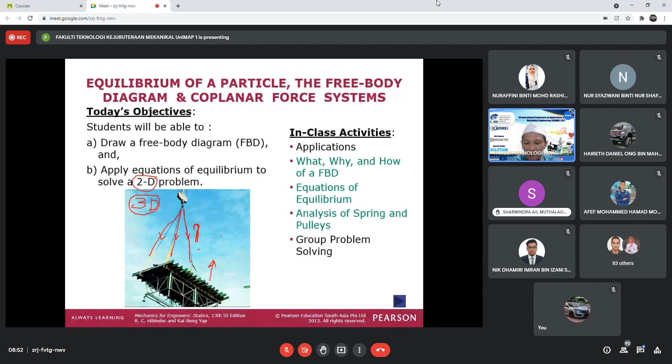So you need to determine what suitable cable to use to lift this object, for example, what size this cable should be, so this cable can withstand the force, boleh bertahan, can carry the weight of the object you want to lift or move. Okay, right. So here you can see this application.

So the crane is lifting a load. For example, we call the load W. W is weight, so the symbol is W. And then to decide if the strap holding the load to the crane hook will fail. So what I see here, they have a strap, like this, like a ring. So they have a cable here, and this is another cable.

Okay. So if we draw the free body diagram, we show it like this. This strap, we assume as a particle. So this force, this other cable, this is cable number 2, this is cable number 3. So we assume F1, F2, F3, and for example F4. So from here, you need to know the force in each cable. You need to know the force in the strap, force here, for example.

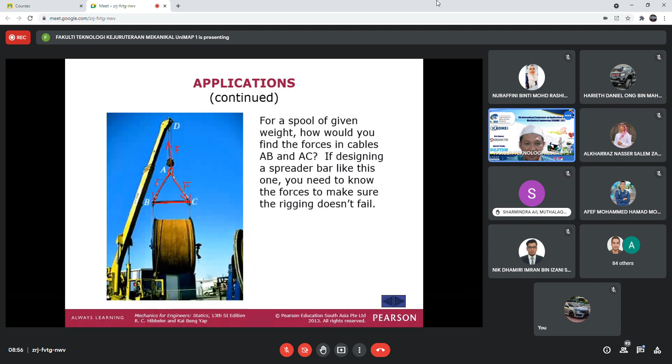Okay, this is the free body diagram. This one we call the free body diagram. In Malay we call it badan jasad bebas. Free body diagram, badan jasad bebas.

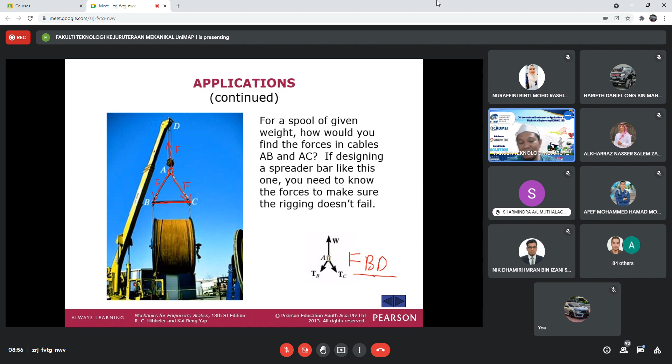Another one. Same procedure, same problem in statics. You need to determine how much force is in this cable.

Okay, alright. How to solve now? The question to you, how to solve now? Okay, for example, this one.

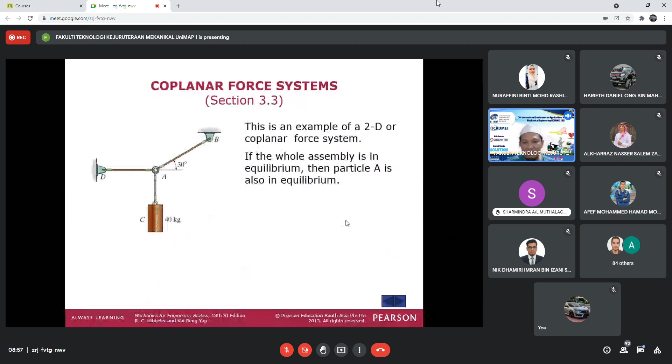For example, in this 2D or coplanar system, if the whole assembly is in equilibrium, then the particle A, this ring, we assume is also in equilibrium. To determine the tension, a symbol T for tension, or force, in the cable for a given weight of cylinder. So they're giving you the weight.

You need to learn how to draw a free body diagram, FBD, and apply the equation of equilibrium, EOE. Free body diagram, FBD. So these two learning knowledge, you need to know: how to draw a free body diagram, and how to use the equation of equilibrium.

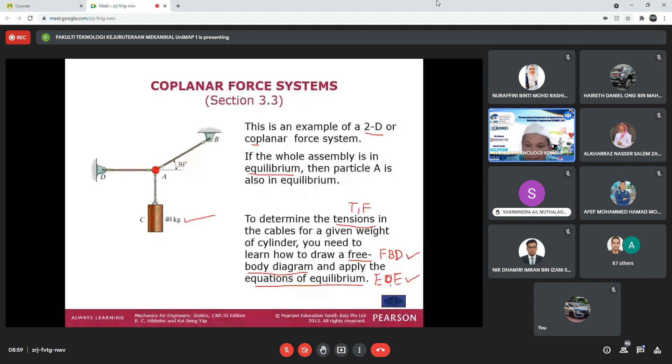From that, what is the equation of equilibrium? Apakah persamaan keseimbangan? And then second is how to use it. Bagaimana nak guna equation ni? Penting ni. So first, you need to know how to draw a free body diagram.

Free body diagram. Second, what is equation of equilibrium? Equation of equilibrium. Third, how to use. Okay, how to use, very important, how to use. This three knowledge, okay, you must know.

You must know this. This knowledge you will study in chapter 3, chapter 5, chapter 6, chapter 7. Four chapters, you will use the same formula in chapter 3, chapter 5, chapter 6, chapter 7. Chapter 5 is equilibrium of a rigid body. Chapter 6, structure. Chapter 7 is friction. You will use these three knowledge.

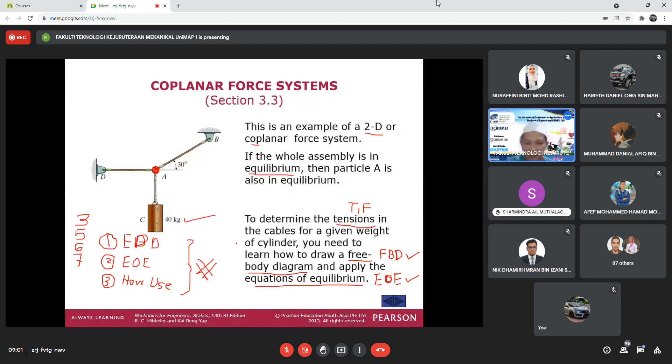Okay, alright. So we continue. We continue. Okay, now, okay, alright.

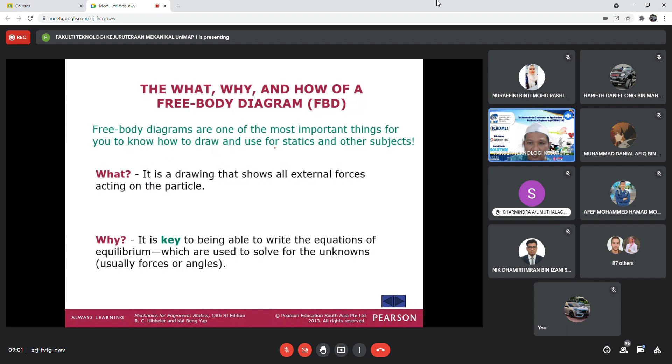The what, why, and how of a free body diagram. Free body diagrams are one of the most important things for you to know how to draw and use for static and other subjects. Other subject that means static. Now you study static. Other subject is dynamic, which is next semester, dynamic next semester in solid mechanics.

External force acting on the particle. For example, you have a particle, so same as what we study just now. You have a particle, so you have cable F1. Maybe you have F2. This one is axis X, this one is axis Y. So they have an angle here, and F2, maybe here they have another force F3, for example. So axis here, angle here. This is external force acting on the particle.

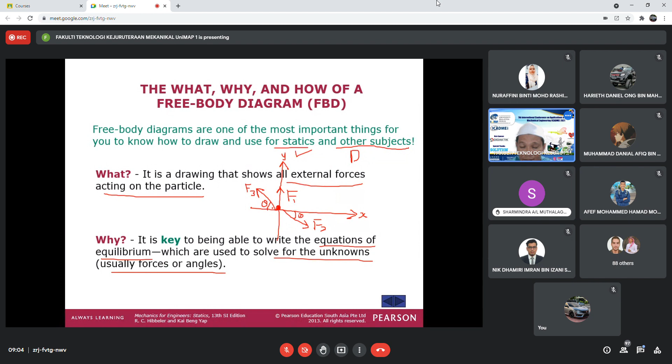Some students solve the problem but don't draw a free body diagram. They calculate and get the answer, and the answer is correct, so I give marks for only maybe half, not full mark. Maybe the full mark is 10 marks. If you calculate and get the correct answer but no free body diagram, you get maybe 7, maybe 5 only. If you draw the free body diagram, show the equation, and calculate to get the answer, you get full marks. Okay, this is a problem.

Some students ask, why you need to draw free body diagram? Actually, very important. It will be useful when you are an engineer. For example, as an engineer, you need to design a lift for a building maybe 10 levels. So as an engineer, you need to design the lift. How much is the speed of the lift? What motor size do you need to use? How much cable size do you need to use? So you design, you design.

You must draw the free body diagram first. You sketch, you draw the free body diagram. You sketch the lift, and from the sketch you write down the forces acting at the design: lift, cable, motor, everything. From that you can calculate how much the size of the cable, how much speed you need to use for the lift. So this is very important, free body diagram.

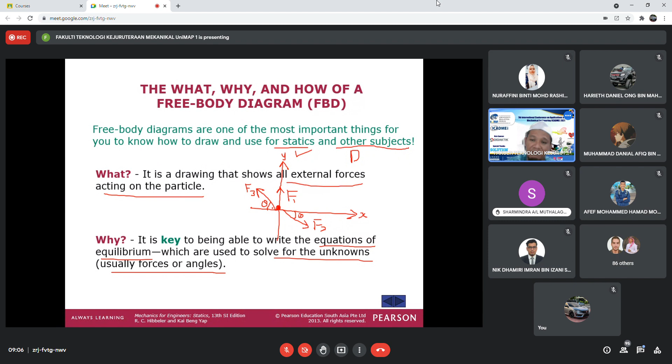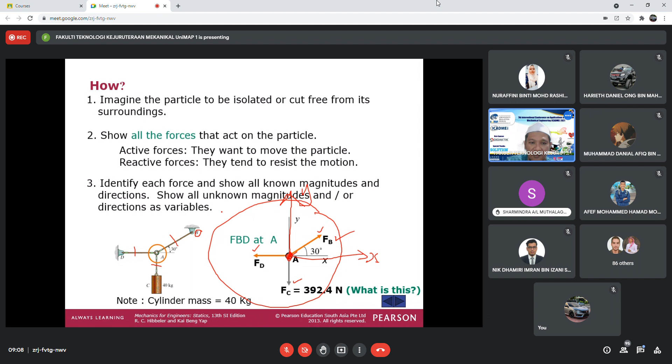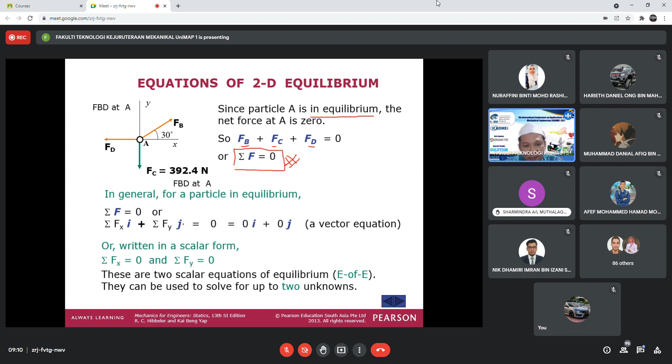You can write, for axis X written in scalar form: Fx equal to 0, Fy equal to 0. From this, summation F equal to 0, so actually they have summation Fx equal to 0, Fy equal to 0. This we call the equation of equilibrium, easy to remember. This is for 2D only.

If you study 3D, summation you have another equation: summation Fz equal to 0. So you study this equation, summation F equal to 0. What is the theory from that?

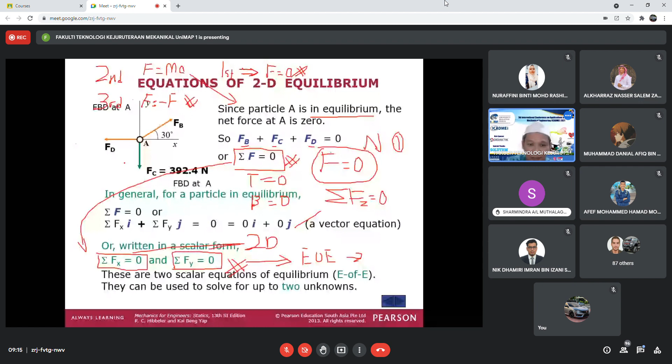Okay, so now you have no question. Using the equation of equilibrium, you can determine summation F for the arrow. So you assume this way is positive, this way is positive, so equal to 0. This is equation number 1, this one is equation number 2.

So from these equations, by mathematical solving, you can determine: FB equal to, you get the answer. FD equal to, you get the answer. If you get the answer as positive, this way is positive. For FD, you get the answer positive. You get the answer from here, then I'll show you. So you get the answer FB and FD from two equations by mathematical solving.

This one is important, using it correctly.

Alright, so until here, any question? Ada soalan?

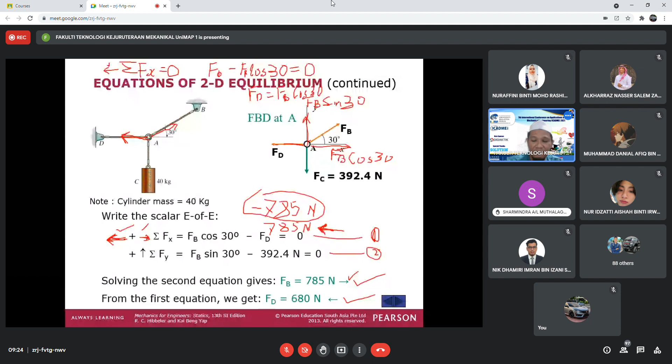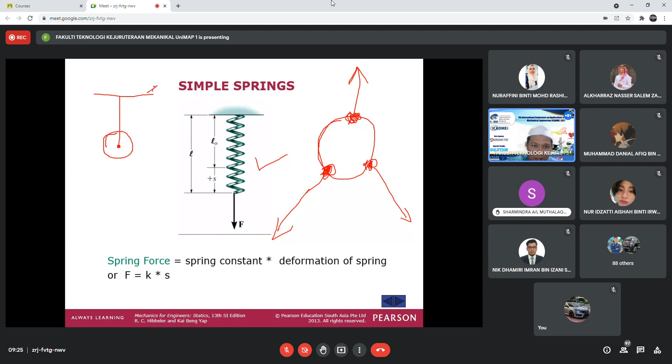Okay, pulley. You know pulley? Takal. In Malay we call... Yes, takal. Kan. Okay, pulley. This one pulley. So they have cable here. So mesh here, mesh.

So another force, another force lah. Force here, force A. For example, FA. So okay. So what you can see from here, this spring, this one spring lah. This spring, this is ring. Okay, ring. Ring. This one is pulley. Okay, pulley. P-U-L-L-E-Y. Pulley ya, pulley.

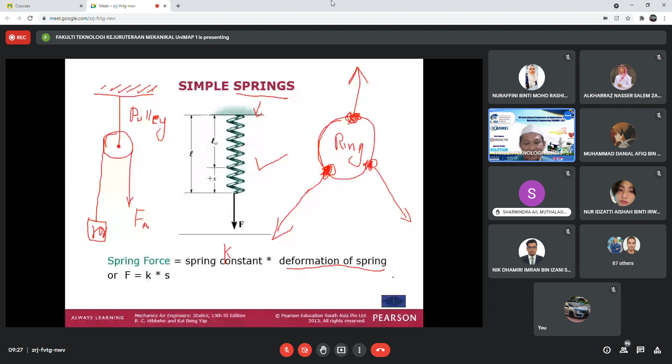So okay, for spring, okay, spring force constant, spring constant, it means K, okay. Deformation of spring, S, S is deformation of spring. When you give the force, you pull, so they have extend. So from LO, we have force. There is no force. When you give in the force, so they increase, they increase length. So L minus LO equal to S. This S is deformation, pemanjangan lah. Displacement. In Malay we call pemanjangan. Pemanjangan. So F equal to KS. This another formula.

Okay. K is the spring constant. We call it the coefficient of spring. In Malay we call it pemalar spring. So different springs have different K. Different K means they have different S. If K is high, S is small. If K is small, S is highest.

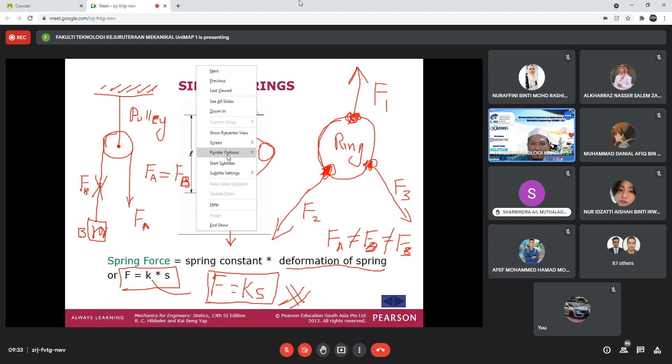So any question? Any question? "No, doctor." Okay, so we proceed.

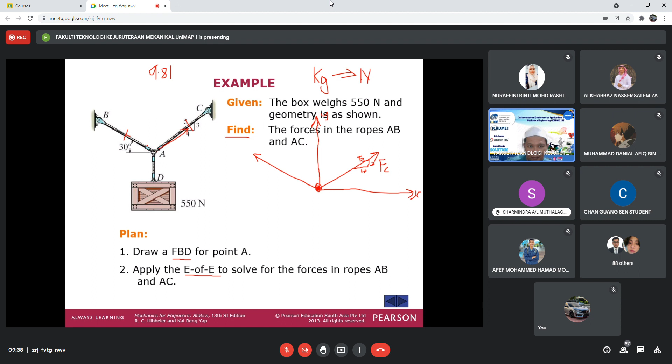I cut here. Okay. So this one is angle. Given to you, angle 30 degrees. So F what? FB, can you put the name? Maybe you need to put FAB. Okay, no problem. You just put F2. Okay, no problem. A1, F1. Okay, but you understand. You understand this. For me, I put FB.

B, and then weight. So the weight is 550 Newton. So you draw free body diagram.

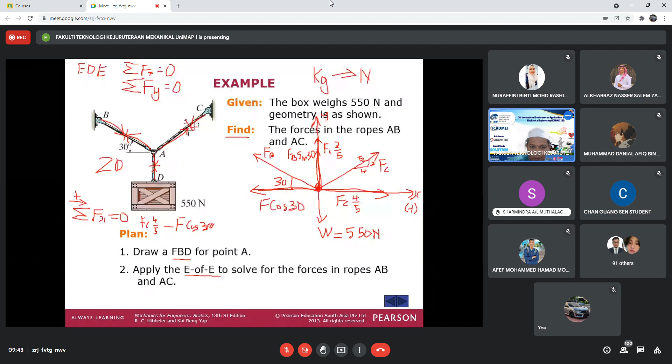Okay, summation, you assume summation Fx equal to 0. So you assume this way positive. Okay, this way positive. What equation do you have now? You have FC 4/5 minus FB cos 30 equal to 0. In this direction they have only two.

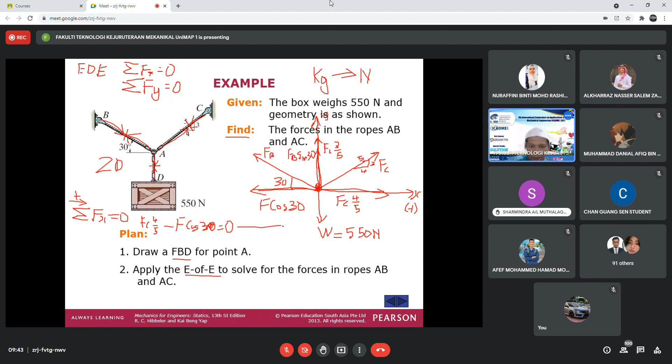Okay, equation number 1. So another one is summation Fy equal to 0. So you assume this one is positive. What you have now? You have FC 3/5, plus FB sin 30, minus W. So W is 550. So equal to 0. So equation number 2. You have two equations, equation number 1 and equation number 2.

So you solve by mathematics, the simple equation. You solve by mathematics, in Malay we call persamaan serentak. In English what do we call it? I don't remember. This one from mathematics you can solve. You can determine FC, how much, and FB, how much. Just from mathematics.

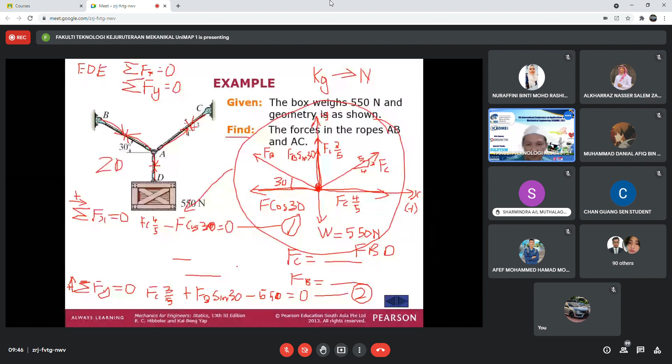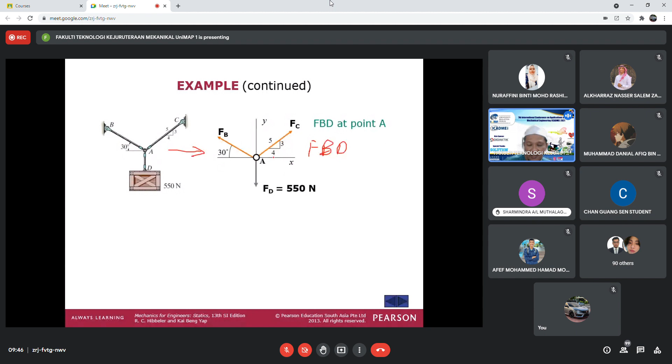Now, from here you draw free body diagram, and then from here you apply equation of equilibrium. Summation Fx equal to 0, equation number 1. Summation Fy equal to 0, equation number 2. So from here, solving the above equations by mathematics you can determine. Okay, right. So finish. That's your answer.

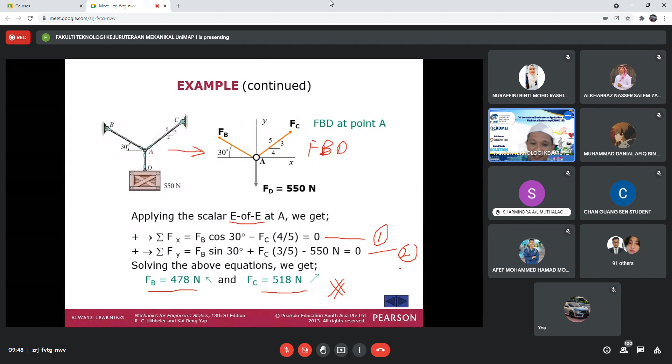So any question? No, doctor. So try to do it again after this class. Try by your own. Do it from zero. Do it from free body diagram. You write down the equation and then you calculate. So this one, if you want to try, you try. If not, it's no problem. This one is group problem.

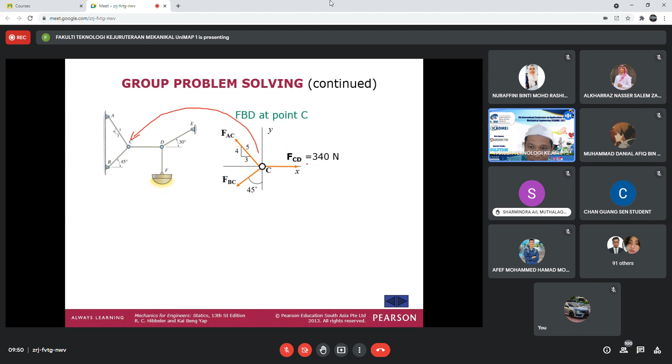So this one is FDC. FDC you determine from free body diagram number 1, from here. This one, FCD. Can you hear me? Okay. So FDC here, FDC. Okay, this one is the same.

Same value. Cut. Okay.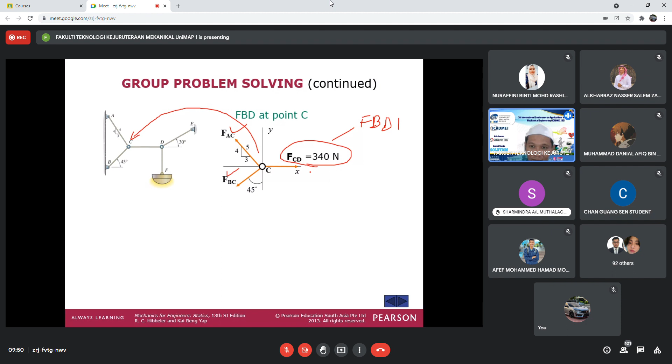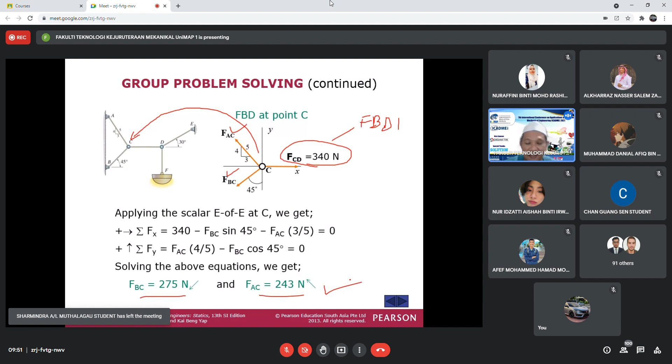So from here you have another free body diagram. From here you can determine FAC and FBC. This one you get from free body diagram number 1. Okay, so you can solve it. Any question? Try to do it by yourself. Try to redo this one. It's simple, easy. This question is simple, easy.

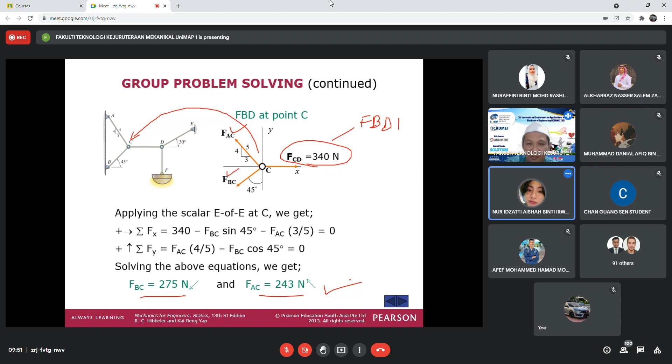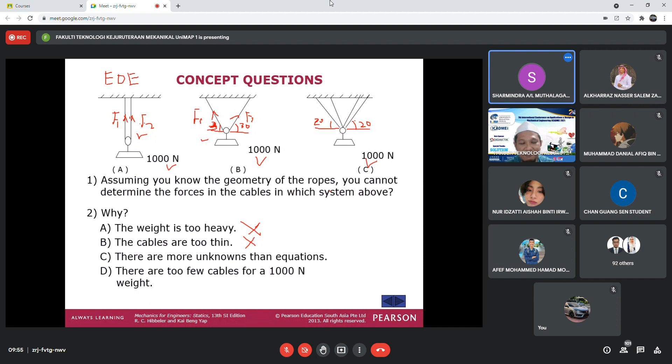F1, F2 have one answer here, and F1, F2 have another answer there. This is for A, this one for B, this one for C. So F1A is not the same as F1B, not the same as F1C. This is your answer.

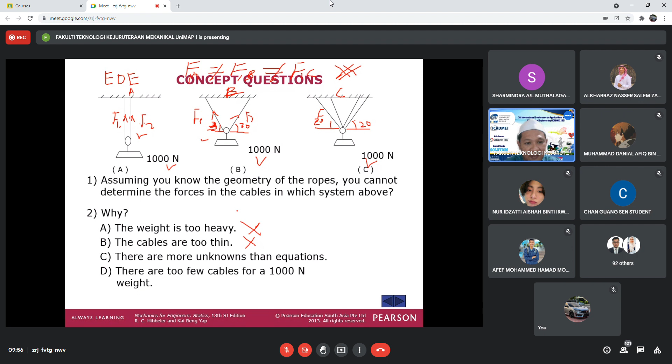This question is what we call a concept question, just to get your idea, to show whether you understand or not. Okay, thank you Prof. Okay, right, try to do the equations on your own. This is simple mathematics.

If no question, next week we continue with 3D. Now it's just 2D. Next week on Thursday we have 3D.